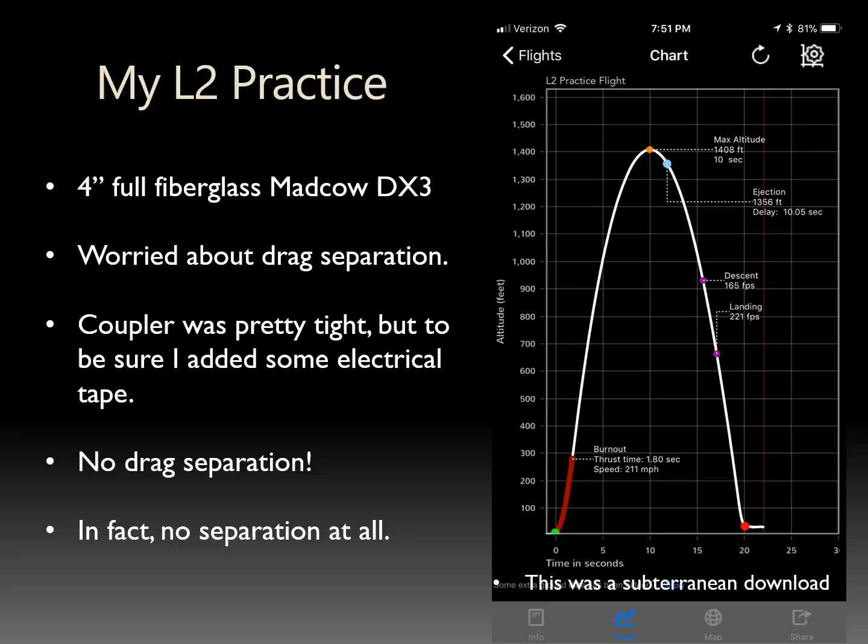And if you look at this chart, you can see that the rocket goes up ballistically and it comes down ballistically. I actually got that graph from my altimeter 3 from underground. That's how deeply this rocket was embedded in the side of a hill. And although I never saw that altimeter 3 again, I was able to get this download before I started digging out my rocket.

So that made me think, okay, I just had this failure on deployment. There was a Chute Release in there, but it never got a chance to be used. And I said, let's go back. Where did all this come from? Is there a better way to do this?

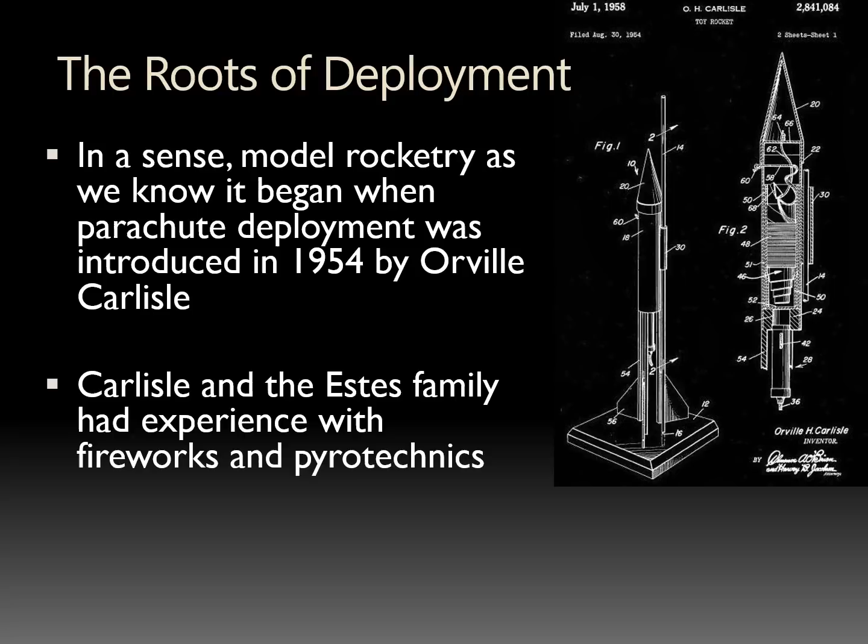Looking at where deployment came from, in a sense, model rocketry as we know it began with Orville Carlisle's development of a rocket that had a parachute back in 1954. A little image there of the first patent, which he got in 1958, I think, later in the 50s. And Orville Carlisle got together with the Estes family, which worked in fireworks and pyrotechnics. So that's kind of the origins of model rocketry. It comes from folks that knew about fireworks and pyrotechnics.

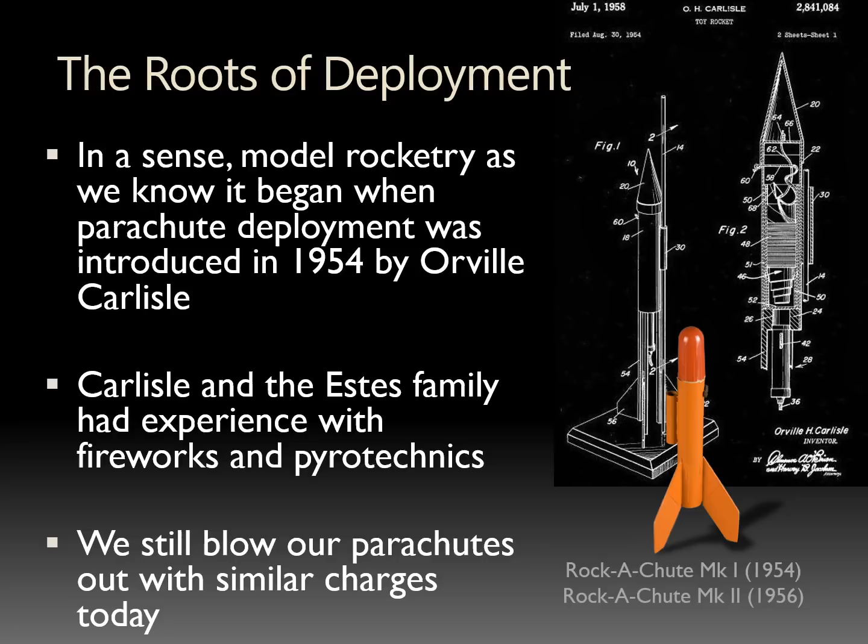And if you look at the Rock-A-Chute Mark II there from 1956, that's pretty much what rockets look like today, with some new developments and things. But we still eject our parachutes with explosive charges. You might say, well, what's wrong with that? It works great, right? Really lightweight, inexpensive system.

Well, it gets everything dirty. Okay, I carry a towel to launches. My rocket box is just full of grit and dirt. Parachutes singed, dirty. The inside of rockets turn into little soot chutes after a while. So things get burnt. I've developed a taste for more expensive parachutes. I really appreciate good parachute construction, and it just hurts to be blowing off explosive charges onto them.

And it can be dangerous. I don't know if any of you have been at a launch where you hear a pop and you see someone jump away from a table behind you.

But that's probably someone trying to test their deployment, or maybe they weren't planning to test their deployment, but that's what happened. And those tests are difficult. It's just difficult. You see videos of people in their backyards with their big rockets firing off their charges, but it's not an easy thing to test. I mean, compare that to Chute Release when you do a ground test and you push a button and you hear a servo whine and your parachute falls open. That's pretty easy to test.

And then there's the whole thing of timing those charges. I mean, so much of it relies on guesswork. Even if you know exactly what your rocket weighs, it depends on how windy the day is. It depends on the trajectory of your rocket. Did it go straight up? Did it go to the side? And so really timing when it comes to ejection is a proxy for what you really want. What you really want is to eject the parachute at the proper place in the trajectory, not at a certain time. That time can vary based on all kinds of factors.

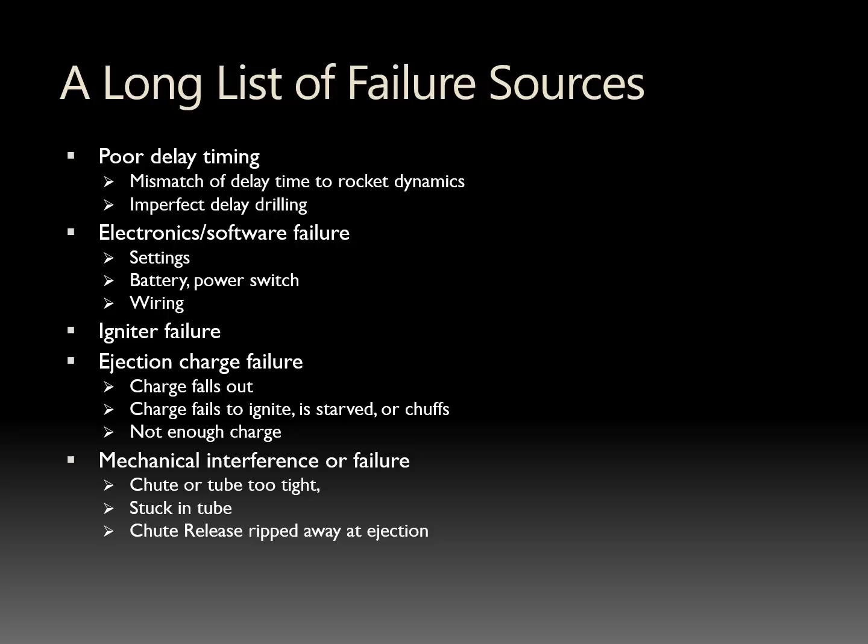And even if you're using something like Chute Release, you can get it ripped away at ejection. Maybe you tether it to the shock cord in a way that when the nose cone flies off and the shock cord pulls tight, it also pulls Chute Release off of your parachute. All kinds of things can happen here.

I wouldn't have believed this if I hadn't seen it, but at one of our launches, I saw a rocket flutter to the ground using Chute Release, and it was because the Nomex blanket was just loosely wrapped around the outside of it, and for some reason in the slipstream the blanket never got whisked away. Even with the Chute Release already released, the whole parachute kind of stayed in a bundle because the Nomex blanket was wrapped around it and perfectly happy to stay there all the way down to the ground. So there's all kinds of things that can go wrong with deployment. We know that deployment is far from perfect now.

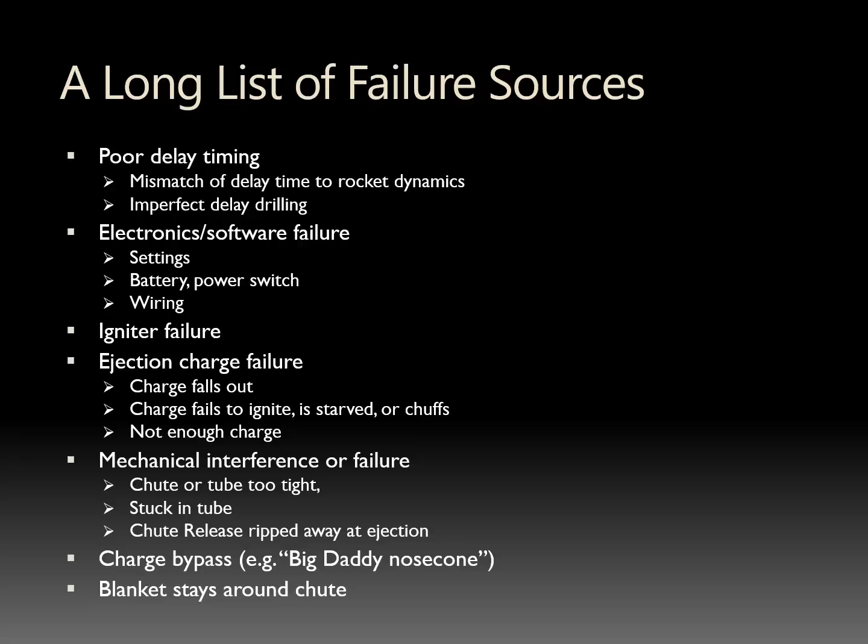So that kind of began my thinking, how do we improve upon the pyrotechnic deployment method created back in 1954? Feels like we could use a little more progress. I mean, here's how I would kind of chart our progress in the hobby. We started with Rocket 1.0, 1954, one explosion, the parachute pops out.

Then we said, oh, well, that parachute, this is like my L1, right? The parachute coming out at the top, that's a long walk on a windy day, and maybe our field's not that large. Let's go to dual deployment. So we went to 2 explosions. One up high with maybe a drogue chute, one down low with our main.

Well, then chute release came along a year or 2 ago, and that kind of got rid of that second explosion. And it basically said if you can get your chute bundle out of your rocket, we can use electronics to decide exactly when we want the second chute to open. Just like we did with dual deployment, but this time there's not an explosion involved.

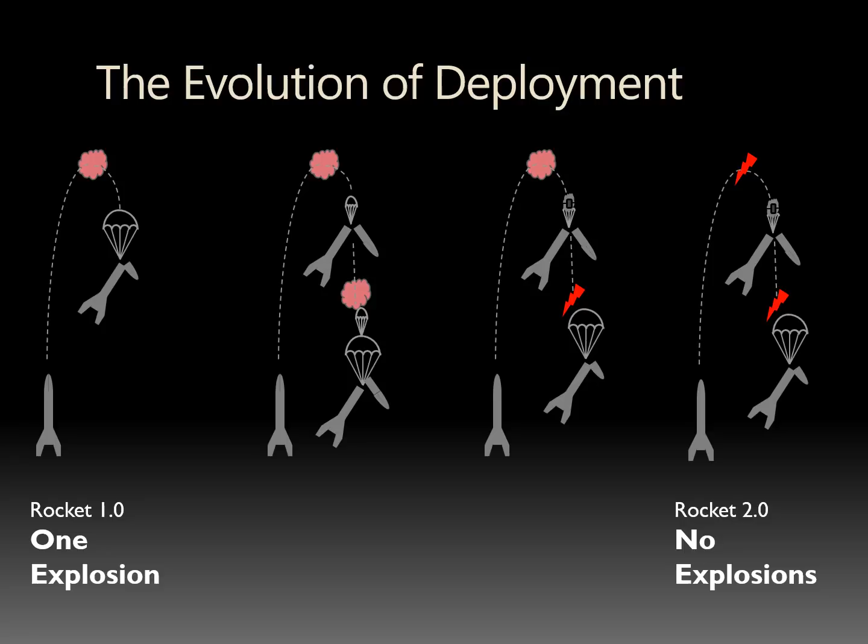Here's what I think we need to get to, and that's Rocket 2.0, and that's no explosions at all. That's get the chute out at apogee with electronics and decide when to deploy our main also with electronics. And then we would only use our engines, our rocket motors, for the up part, for the lift part. And everything after that would be handled by electronics.

And so, you look, how are other people doing this? If you look at commercial rocket flight, if you look at the United Launch Alliance and what they're doing with Titan, there's a 3-part fairing that they open up to deploy satellites. You look at SpaceX, there's a 2-part fairing that they use. So there's inspirations here for the way that other people are doing deployments that aren't pyrotechnic.

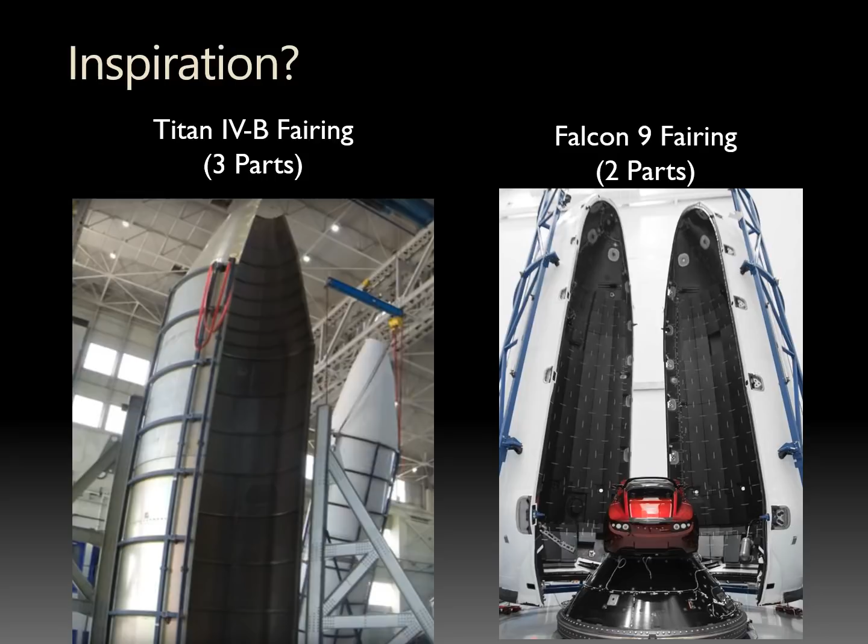And actually, the interesting thing when you start to look at these, if you look at the Falcon 9 user's guide from SpaceX, you'll see that they talk about one of the features of their fairing being that it relies on non-explosive pneumatic release and separation systems. Well, there's good reasons for that, right? You don't want to be throwing stuff into space, into orbit. There's already enough junk up there. They like the fact that you can test it.

In other words, if you've got an explosive pyrotechnic bolt, you run a test, right? You go pow, and that bolt goes off, and you say, okay, that bolt worked. But then what are you going to do? You're going to have to take another bolt and install it before flight. So you're not really testing what you're using. You're testing something like what you're using, and you're testing other parts of your setup, but you can't completely test it because it's destructive.

And then I found this really most interesting to me: here's even SpaceX saying that they want to eliminate hazardous pyrotechnic devices. Come on, if SpaceX is thinking about safety and explosions, I think we can too. So here's the goal, okay? If you're gonna evolve this, if you're gonna change this and make it better, you've got to do it right. It's got to be reliable, complete release. A deployment that only half happens isn't deployment.

Testable. We just talked about testable. Anything we come up with that lets us convince ourselves before the launch that it's going to work is a good thing. Redundancy. I'll even go out on a limb and say that redundancy is always good. I mean, you have to have redundancy for an L3 certification, but I would even say redundancy would be good if you were launching with Boy Scouts in a schoolyard. Redundancy is always a good thing if you can afford it, if there's room for it, if it doesn't cost too much.

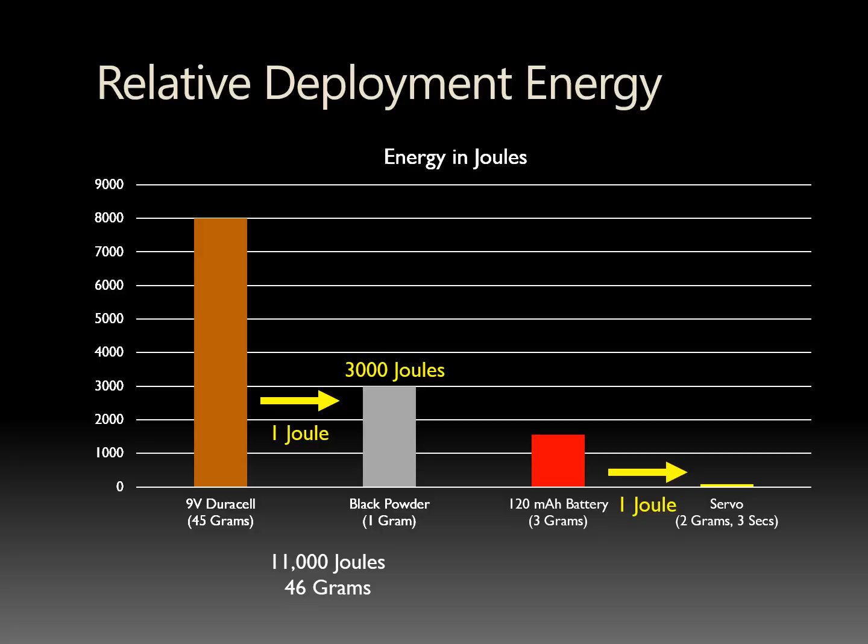It transfers the same rough energy, 1 joule, to a servo, and this servo weighs a little under 2 grams. And that servo lets your chute go with about 1/4 of a joule of energy, and that's being generous. So let's compare this for a second. Let's say this is the secondary event of a rocket flight. We use 3,000 joules to explode a parachute out in one case. In the other case, we're going to use 1/4 of a joule to let go and let a parachute open.

So this isn't the only way you have to do it. Lots of other ways to do it. There's all kinds of savings and things you guys can come up with for this, but I'm just telling you, this is kind of what's going on in terms of relative deployment energy on a secondary event. So it's just interesting, like how much energy does it really take to get the job done? Go back to first principles and say, one virtue might be to come up with solutions which require very little activation energy at the time, okay? That's kind of how I think about these things, and maybe it'll spark some thoughts with you too.

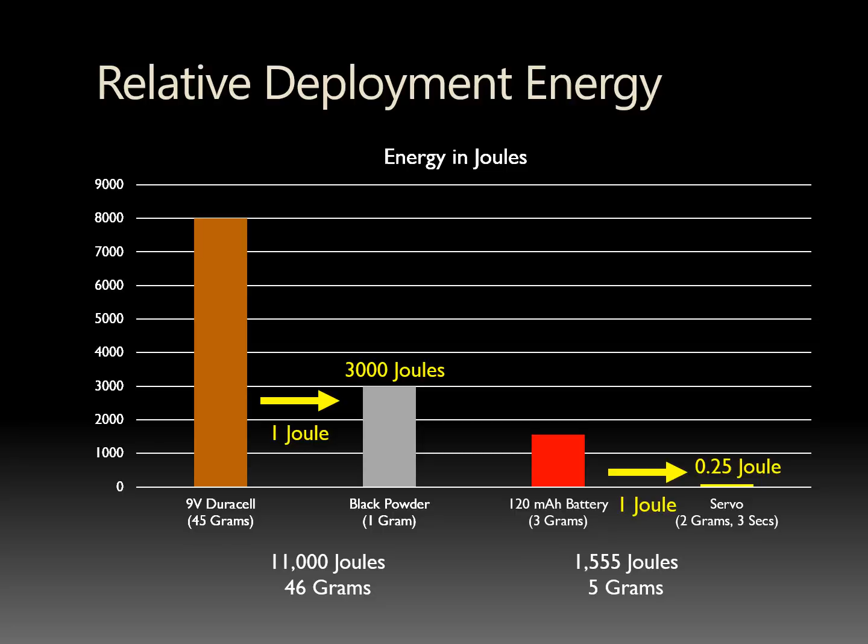Okay, so we looked at the SpaceX and United Launch Alliance approaches to fairing. That's one way to do it. A fairing is the name of anything that's got a streamlined aspect. But you could also do it in a payload section, and that's a little bit more like what we're used to when we do dual deployment. We'll have a payload section. Here I'm proposing that we make a payload section that opens.

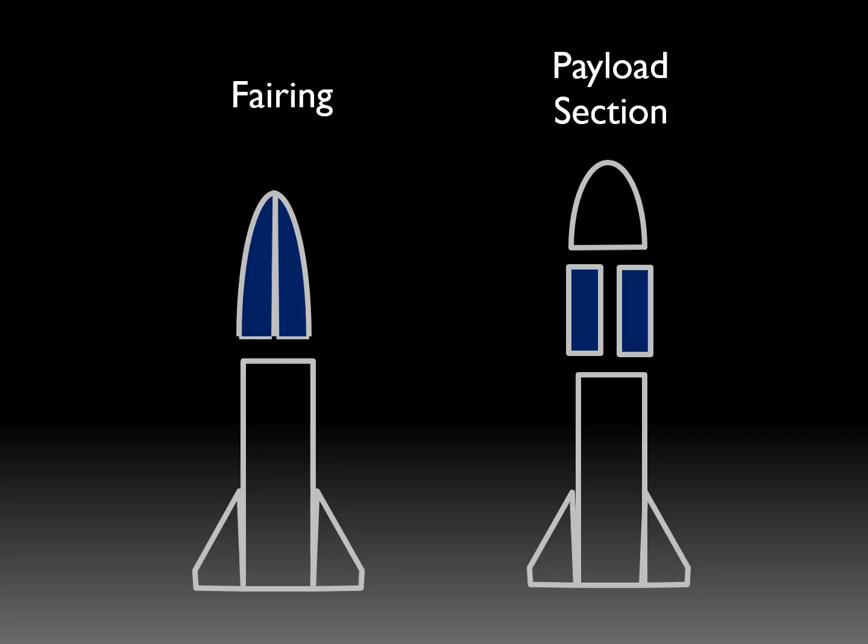And so let's compare these two. Which approach should we do? Should we just make a new kind of electronic fairing that goes on the top of a rocket? Should we make electronic payload sections? How should we do this? Here's the challenges. No matter which way we pick, we need to make it strong during boost. We can't have it flying apart if we have a high thrust motor.

But even though it's strong on the way up, it's got to fall apart at deployment, right? And then we have to figure out the electrical and the software parts to make that happen. So think about that. On the one hand, you want it to be incredibly strong on the way up, and then all of a sudden you want it to just fall apart. So here's the relative merits of those two approaches.

If we go with a nose cone fairing, it is somewhat mechanically simpler if you work through it. I'm not saying it's obvious just by looking at it, but having looked through it a little bit myself, I think it's somewhat mechanically simpler, but it is expensive to make supersonic. It's expensive to make something that opens but that can cope with the heat, especially of transonic flight.

But here's the killer on this one. There's many variations needed. In other words, as soon as you pick a shape for that nose cone fairing, you, for instance, can't make a Nike Smoke, which has the sharp nose cone. You can't make scale stuff unless it just happens to have the exact same nose cone as that.

But if we move to a payload section, it does get a little more mechanically complicated. It's suddenly got two interfaces, the top and the bottom, that connect to things like the nose cone and the fuselage. Those tethered parts could tangle, but it is more universal. Almost every rocket design, even the scale ones, have a circular cross-section part of them. In other words, you can always find a place in a rocket where a cylinder can be put and still make the rocket look like you want it to look. Not all of them, but the vast majority of them.

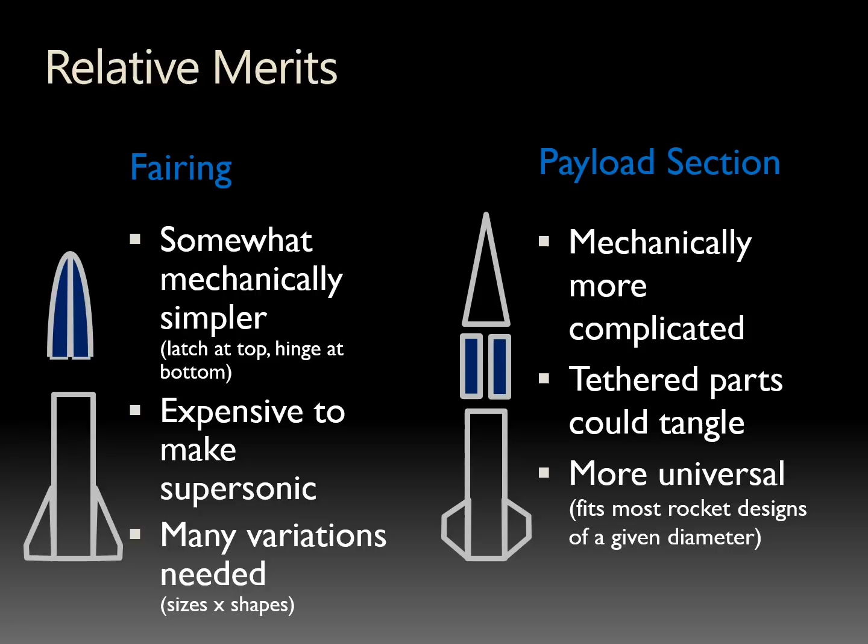For instance, here's that same payload section on a Nike Smoke. So you can see that we couldn't have done that with the nose fairing approach. We can do it with a payload section approach.

Let's talk a little bit more about those mechanical challenges, because it does need to stay together on the way up, but it must reliably and completely fall apart and use low energy to do so. Remember, that's one of our virtues here, is low activation energy. It should be cheaply constructed. And when you think about all those constraints, it becomes an interesting puzzle. You're trying to make something that is reliably rugged, but has a little fatal flaw you can activate that makes the whole thing fall apart.

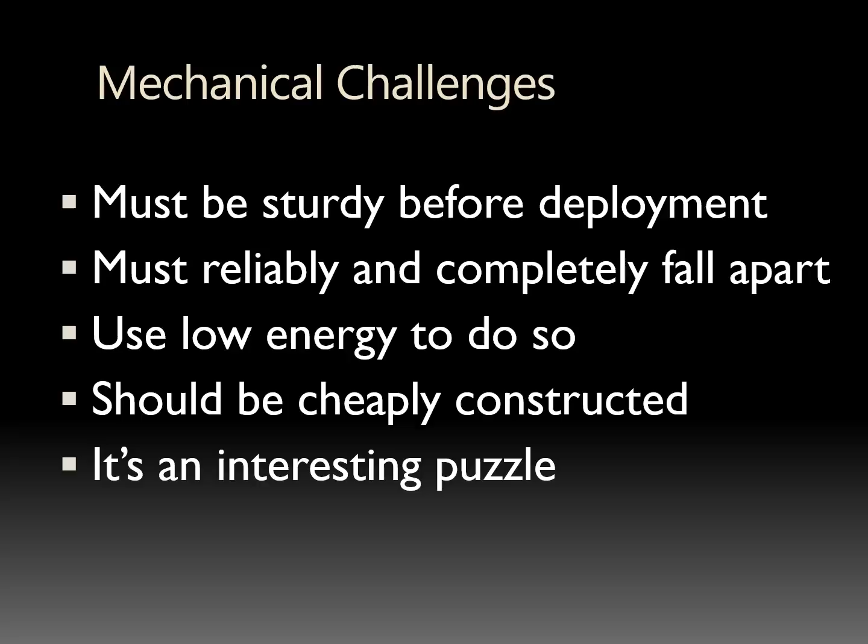Let me walk you through a construction of what something like this might look like. And this is just one way to do it, not the only way to do it. And that is to have cheap injection molded adapters. You attach couplers to your standard tubes, including making ones that are vented so that if you still have engines with ejection charges, they won't interfere with anything. We're just going to throw the ejection charge away. We don't need it. Any redundancy that we need, we'll do electronically. And after a while, we won't even have engines that have ejection charges anymore.

The bottom part of the rocket's the booster. It is only there for the up part. It does not need to have an ejection channel. We'll vent it if we still got engines that use ejection charges. If we have a choice, we won't even put the ejection charge in the motor. And then what we'll have are payload bay doors and smart couplers. And the electronics will be in the smart couplers. The payload bay doors will be very inexpensive, probably injection molded, rugged plastic.

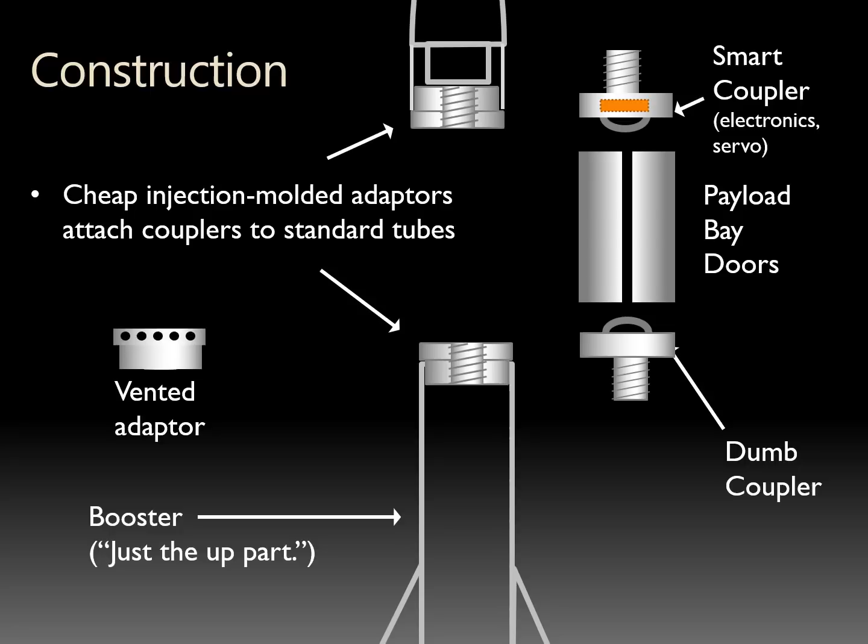And notice here, we've got two couplers. We'll design this in a clever enough way that if either one of those couplers releases the payloads, they'll both fall apart. So we can make it redundant by putting electronics in both couplers, or we can just put them in one end if we're not as concerned with redundancy.

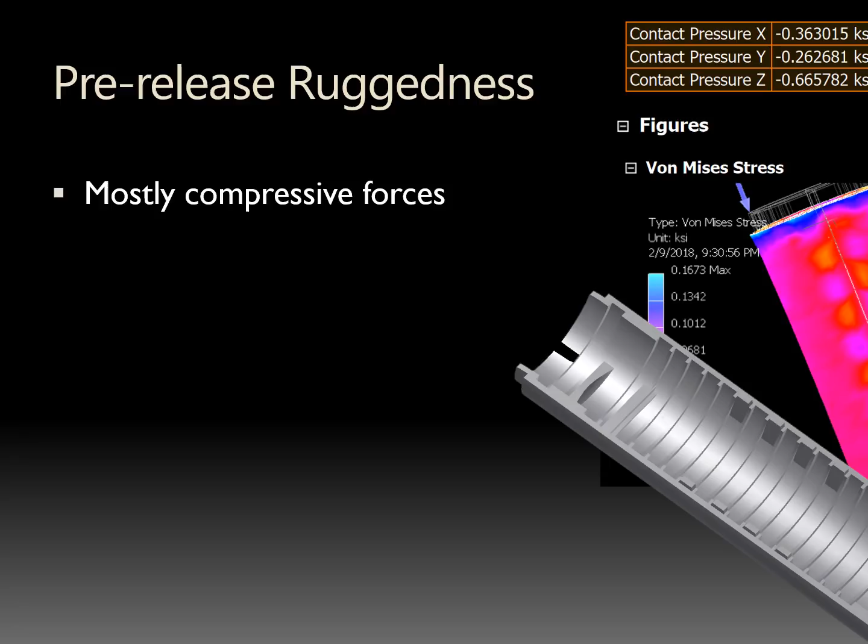Here's an actual example. I've done some analysis. At the presentation at NARCON, I passed around a 3D printed model of this. And one of the things that helps us during rocket flight is that most of the stress is caused by compressive forces in a rocket. There are some lateral forces and moments and shears, but it's mostly compressive. There's relatively little tension in a rocket. You do get some of those when you've got corkscrewing, because you've got some thrashing around the rocket and some moments that are introduced. Usually those won't rise to tension because there's so much compressive force being put on them, but you do get variation because of that non-optimal flight.

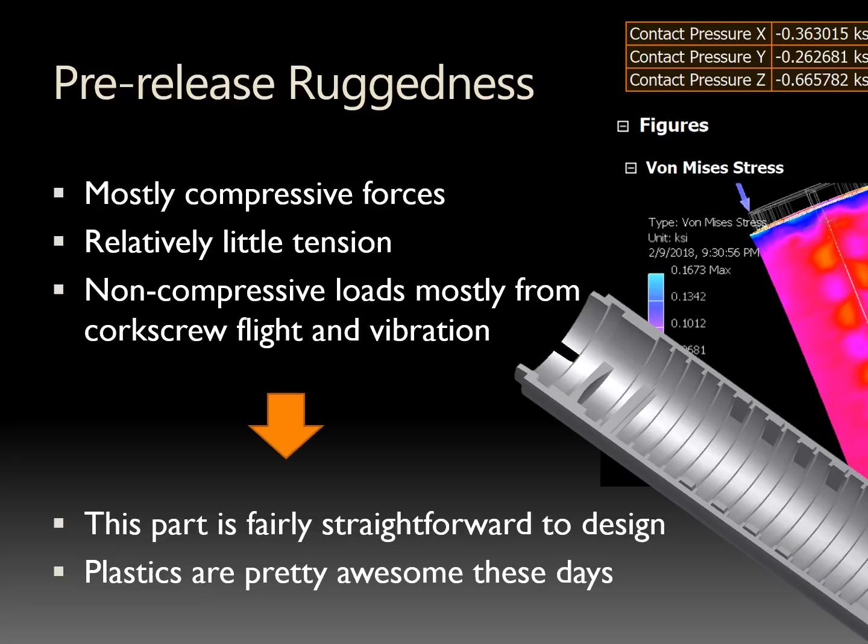But this part, coping with compressive strength, is relatively straightforward to design. There are some great engineering plastics now that are in some cases as strong as steel. And the difference in price between a very cheap plastic and a very expensive plastic is on the order of dollars. And so we've got some amazing materials that we can work with today if we need them. But like I said, this is not that overwhelming of a mechanical design problem.

Here's what a rocket looks like during boost. Notice we've actually got a vented coupler there just to exhaust the ejection charge from the motor. You might not need that later if you have motors that are plugged and don't have ejection charges. And what happens is it falls apart. When the couplers release, the rocket falls apart. In this case, you've got a parachute there that's bundled up. You can put a chute release on that and have a dual deployment system there.

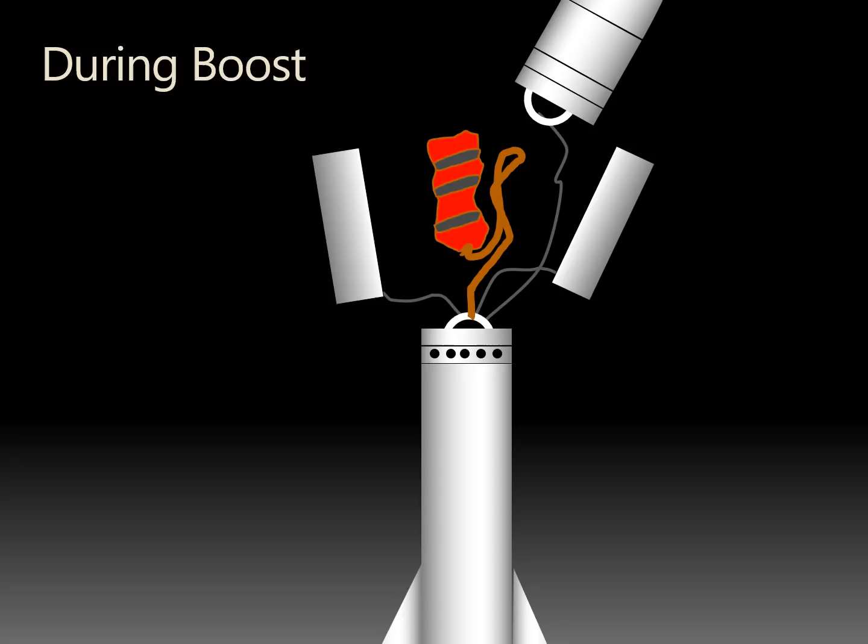After you release, what affects reliability? Well, this is trickier than the boost phase, okay? Because it's got to just disintegrate with little activation energy. And it shouldn't hang up or jam or tangle. That's going to be our challenge here, I think.

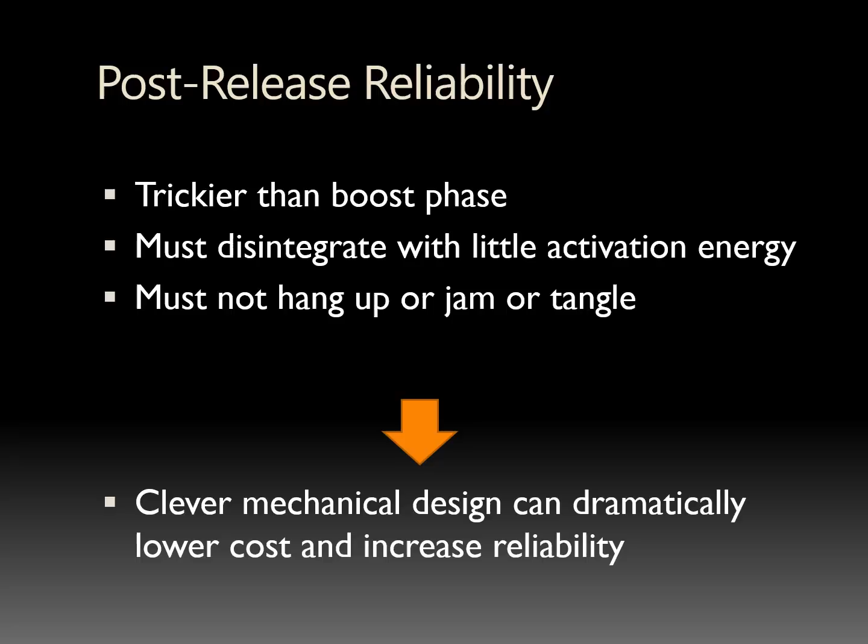But with clever mechanical design, you can reduce the cost and increase the reliability and take some of the burden off of the electronics. In other words, you can imagine very complicated electronics with sliding guide rails and lots of hooks and things like that. Or you can come up with a mechanical design that has a little fatal flaw that the electronics can trigger. Kind of tough for me to explain that without showing you one, but that's the goal here.

So we need cheap tube adapters that we can add onto existing rockets, cheap payload sections or fairings. If we do the nose approach, that's called a fairing, but cheap plastic doors. If we break one, it's a few dollars to replace. Couplers, both smart and dumb. Remember, if we design a coupler correctly, if either end of the payload bay doors releases, the whole thing falls apart. If we make them both release, we've got redundancy. It's going to fall apart no matter what. And then portable little smart actuators.

I think if we do this correctly, we'll take all the brains and the actuator part of this, make it modular, so that what you're essentially doing is you're equipping your rockets for electronic deployment by putting cheap adapters in your fuselages and on your nose cones. You can swap the sections across rockets, but you can also swap the guts, so the electronics parts. You don't need as many sets of those, and you can snap them in any rocket, whether it's a 2.6 inch diameter rocket or a 5.5 inch diameter rocket. You'll use the same electronics for both. That's a virtue, that modularity.

And once we've got this kind of payload thing, we can use it with Chute Release for dual deploy. So we'll pop open our fairing at apogee and we'll have our chute wrapped with Chute Release, or a drogue and Chute Release, or a drogue and Chute Release on a bag, or drogue and Chute Release with a mechanism. So that bag and that mechanism are things we're working on now that would let a standard Chute Release deploy, for instance, a 10-foot parachute by a clever mechanism that holds a bag closed.

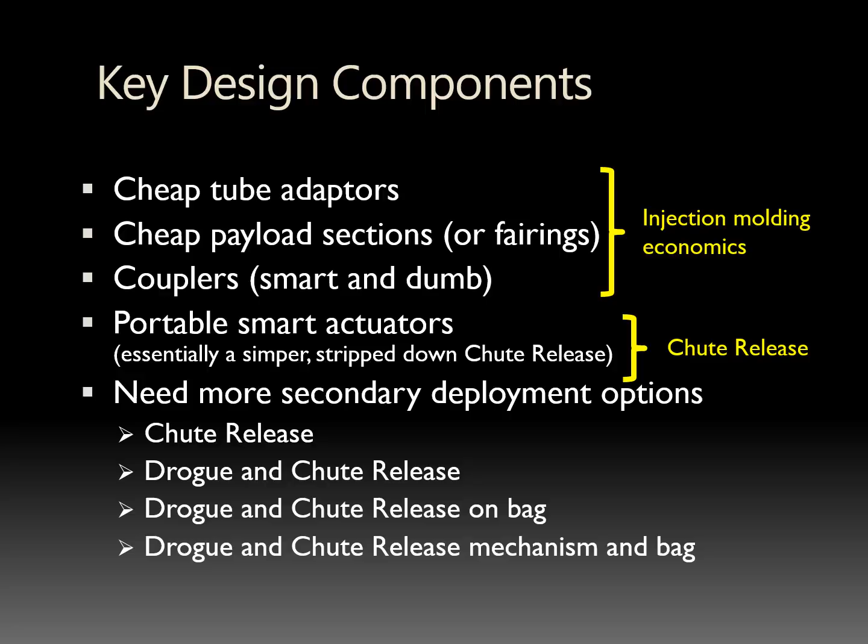So let's talk about some of the implications of going with a system like that. It'll make dual deployment more widely available. I think everybody ought to do dual deployment. I think Cub Scouts in the schoolyard ought to do dual deployment. Safe, no explosives, no mess. I'm really looking forward to this. More modular reuse across your fleet if we do it right, like Chute Release.

I mean, think about when Chute Release came out. I don't think everybody really fully appreciated the value of something that was easy to move from rocket to rocket versus, for instance, a dual deployment altimeter, which you would screw into a payload section, install in a rocket, run wires, connect wires, hardwire everything up. Suddenly you've got something that not only moves from rocket to rocket, doesn't get installed, but actually sets up a lot quicker too, right? Than a dual deployment altimeter and a charge and wires and all of those kinds of things. So modularity is a good thing. We ought to try to keep that going on this.

No timing, no delays. There's no such thing as timing anymore, right? Timing was a proxy for when to deploy a parachute anyway. Now what we'll do is we'll have payload bay doors that always open at apogee, and we can run whatever engine we want. I mean, grab a G80, grab an I-210. It doesn't matter. What is the timing? There's no timing anymore. You're just choosing how much impulse you're going to lift your rocket with. Deployment is a separate thing. We're not loading that onto the rocket engine anymore.

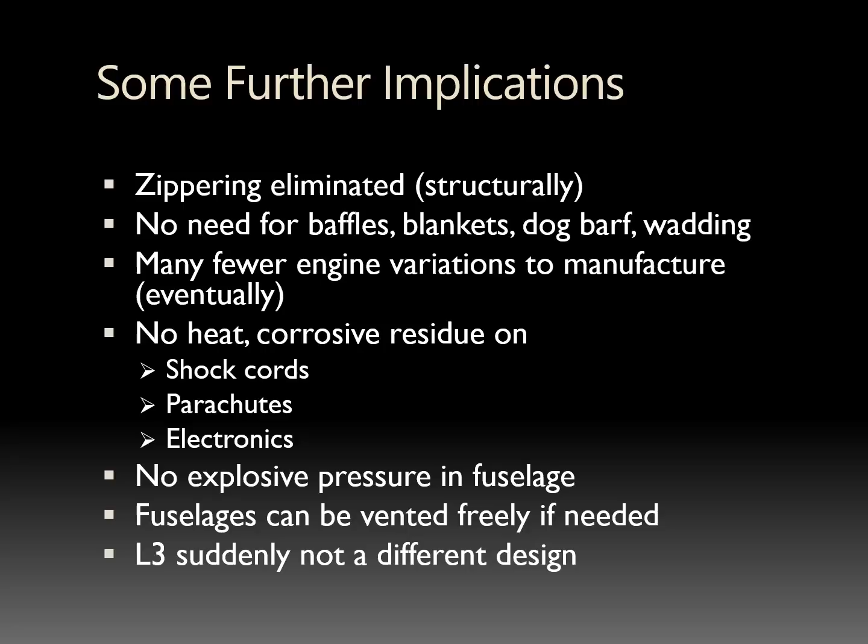If you get good at electronic, non-pyrotechnic dual deployment on a small rocket, on a rocket the size of an Estes Pro Series 2, then when it comes time to do your L3, you know all the elements of that. And along with all the written knowledge that you need and the tests you need to do and the documenting of your build, you've kind of already got a redundant rocket.

Some final thoughts. Weight will be a challenge on this. The original method of pyrotechnic deployment developed by Orville Carlisle in 1954 may never be surpassed in terms of how little it weighs and how little it costs. Very clever. You just burn through to a little ejection charge, and the energy from that ejection charge will blow the chute out. So when it comes to weight and cost, really nice optimal solution. It's just all those other limitations that lead us to this presentation today.

I think that with careful mechanical design and material selection, you can get this to a very low activation energy, very reliable system. And I think the materials that we can use for this can be cheap and can have fantastic properties. And even with this, you may say to yourself, well, oh God, everything's getting so automated and plasticky. You've taken all the fun out of balsa and cardboard tube design and construction of rockets.

I don't think so. I think now you could put loving attention into, for instance, a Mercury scale model and feel a lot more confident that this thing's going to get back to you, right? You're going to have advanced electronics inside your rocket. You're going to have nice, clean deployments. You're not going to have any explosions going off inside your Mercury scale rocket that you put so much time and attention to. I think there will still be room for craftsmanship.

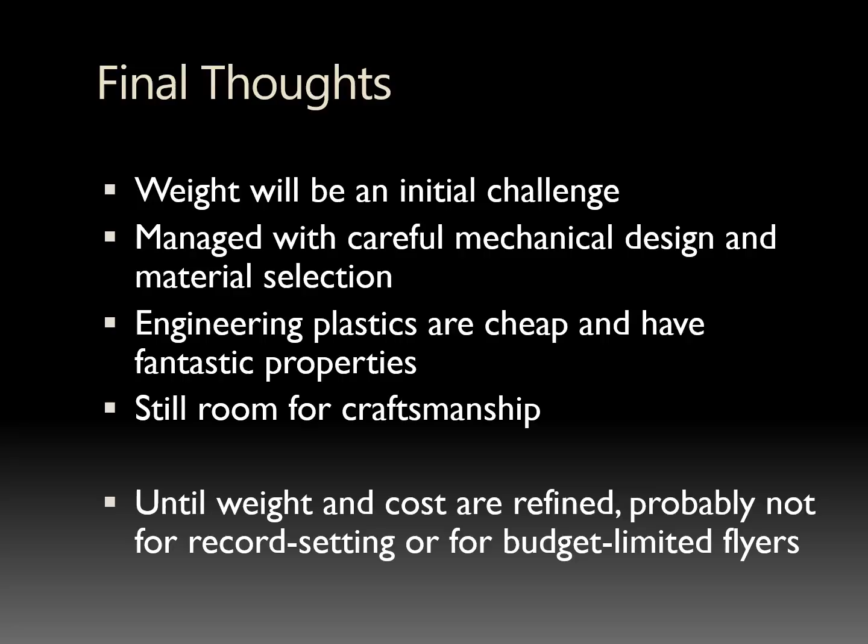But I will say that until we get really, really good at lowering the weight and cost of this approach, I'll grant that you probably won't see these being used for record altitude attempts or for people that are really, really budget limited. But I think in the long run, this is probably only limited by the cost of materials. I think this will be very, very inexpensive not too long from now.